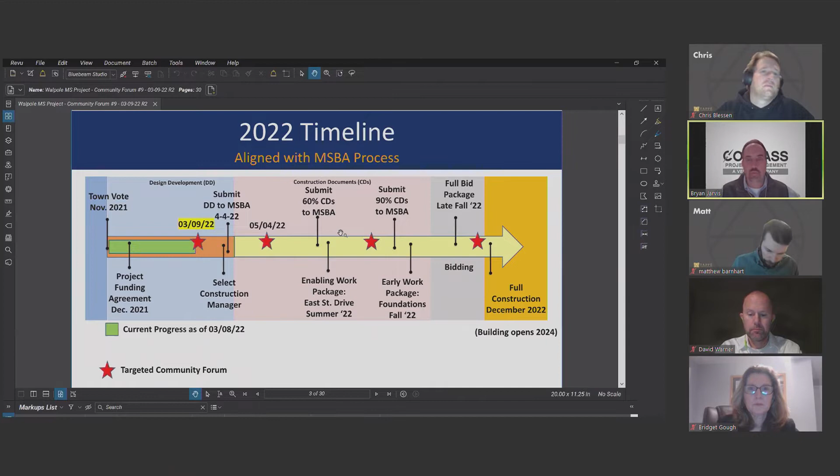The community forums that you see are target dates. We'll obviously adjust those based on when we think will be a good time for folks to meet. We'll definitely have one prior to the start of school, potentially right after the start of school as well, and obviously before we get into full construction. There might be a need for more depending on what information needs to be shared, but we will keep that updated as we move along. This timeline will be posted to the website after tonight's meeting, so you can reference that at your leisure.

Talking about bringing on the construction manager, we're currently doing that right now. We started that process after the town approved the project. We submitted an application to the Inspector General's office. They have to review that to make sure that the project is actually set up and would benefit from having a construction manager at risk. They review that and get back to us and issue what's called a notice to proceed. They did that in January. We sent out, it's a two-step procurement process.

We sent out an RFQ, request for qualifications, to see what construction managers are interested. They submit back what is called a statement of qualifications, basically their resume saying that yes, they have the experience, et cetera, to do this type of project. The town has created a qualification and selection committee. We've reviewed those statements of qualifications. We received 8 of those from 8 interested firms in the beginning of February. We've since narrowed that down to a short list of 4 at the start of this month.

And we will be receiving what's called proposals from a request for proposals as the next step. Those are due in 2 weeks from now. And we anticipate having interviews with all 4 shortlisted firms by the end of the month. And the goal would be to get the selected firm on board in April.

One of the benefits of construction manager at risk is the construction manager or the contractor will actually join the project team during design and help with things like estimating, working through the phasing and logistics of the project, like looking at the construction documents and making sure all the details are correct and things can be built the way they're designed and they're not going to run into issues. So it is an advantage. It does allow us to put together the project team earlier in the process so we can hit the ground running when construction starts.

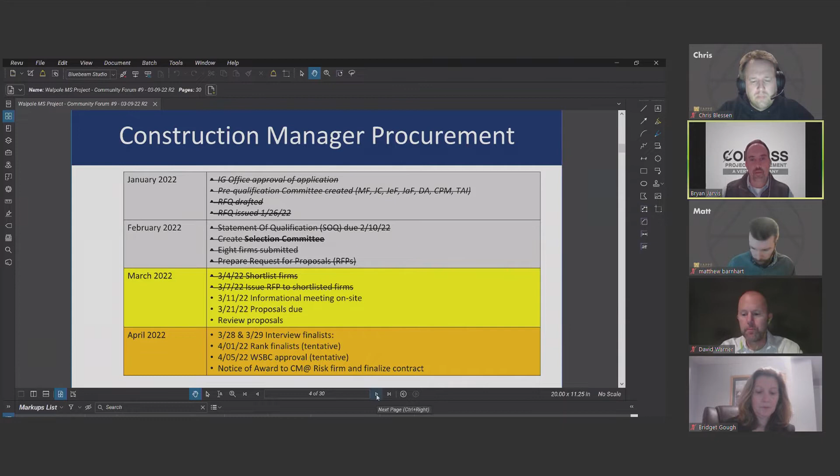Just big picture timeline, quickly, as I mentioned, there could be some early packages this summer that we'll talk about, really related to the enabling phase and getting the Bird site ready for construction. So when school resumes next year, we'll have the access and the temporary roadways and/or parking lots and separation from construction space and school space set up in advance, and then potentially starting on foundations of the new building as early as this fall, with full construction towards the end of this year in December.

Overall construction is estimated to take 32 months, give or take. And again, we'll be working through all of this with the construction manager when they're on board to refine some of these details and timelines, et cetera.

But we're anticipating 3 phases at this point: the enabling phase that I mentioned, building the new building, and then once that building is complete and Bird and Johnson are able to move in, then demolishing the existing Bird school building, finishing the site, which includes the parking lot, some of the access roads, and final landscaping and things of that nature.

The new building will be open for occupancy right now, targeting fall of 2024, with the project completed sometime early in 2025, obviously allowing for the spring weather and landscaping and things like that. And we anticipate that the project would be closed out potentially as early as the following year, 2026.

Which means all the construction work is done, all the punch lists are done, all of the final information is closed out, the final payment application has been done, all of that's been sent into the Mass School Building Authority, who will perform a final audit of everything. They hold the last 5% reimbursement to the town until that audit is complete. That process takes about 10 months to a year. So potentially by the beginning of 2026, the district would actually receive its final reimbursement back from the MSBA and the project would be closed.

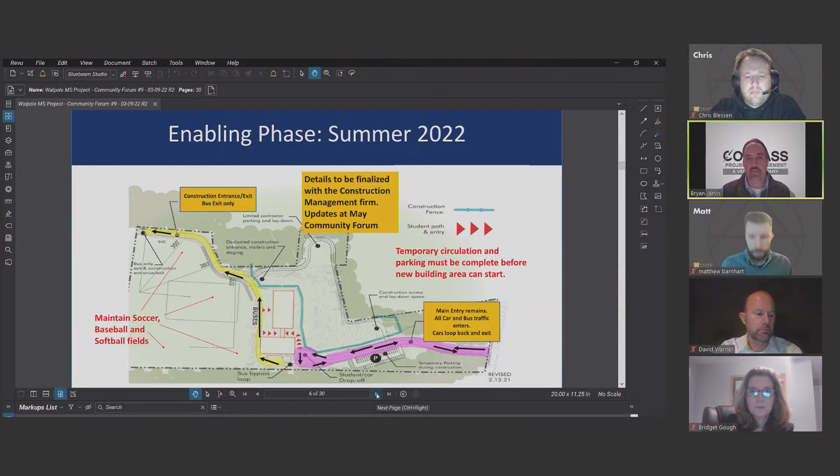Following the enabling phase will actually be the construction of the building. So once we're able to isolate the school's operation with the temporary bus loop and the drop-off loops and the parking, the construction fence will go up and construction will happen on the footprint of the new school, which you see here in the dotted red line.

Relatively close to the existing building. However, this is very typical for a lot of current school projects, simply because the existing school sites in many towns are the only sites large enough to actually fit new school buildings.

We've done this many times before. Most recently at the Natick Middle School, we were as close as 20 to 30 feet between the two existing buildings at certain aspects of construction. We also did this at Norwood High School, building the brand new high school directly behind the old high school. But most of our school projects, probably 90% plus, involve some form of the new building either in front or in back of an existing school, and then taking down the building once that's complete.

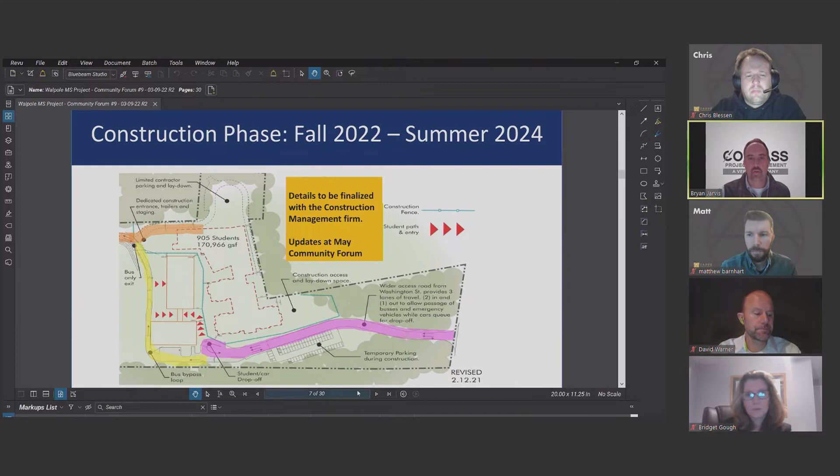So something we're very familiar with. The contractors we'll be interviewing are all very familiar with that too. They've done many similar projects, so we'll make sure to mitigate as many impacts to the school as possible. We'll be back to you with more details in May, but this is the general phasing of what we plan to do: set up the enabling phase this summer and fall, build the new building for approximately two years, and then finally, when that's all done, tear down the old building and finish the site.

And with that, I'll transition over to Tappé and Warner Larson to talk a little bit about the site plan. I think, David, you're up.

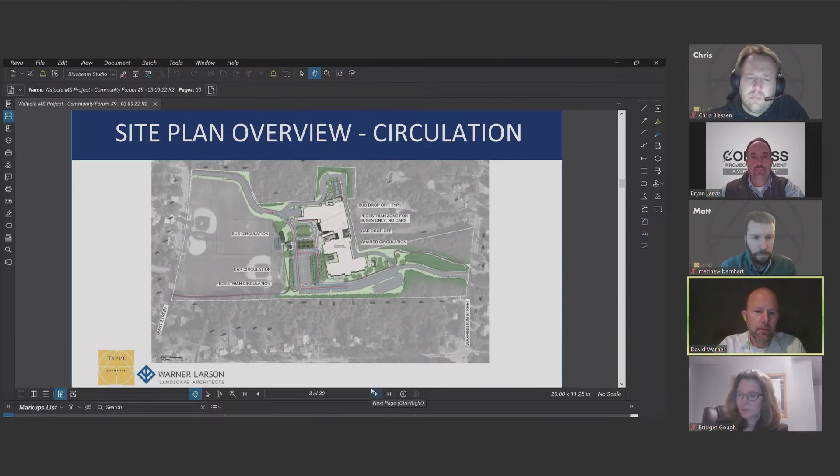Okay, thanks Chris. Thank you, Bryan. David Warner with Warner Larson Landscape Architects. The plan you're looking at is after all of the construction is complete. Bryan showed you how the phasing would work, but this is just an overview, and then I'm going to zoom in and focus on the circulation on the next slide. East Street is to the left and Washington Street is to the right.

Preserving the baseball field and all of the athletic fields is a very important part of the overall design concept, routing that new bus driveway coming in off of the street close to the property line. Another key component to the site design was preserving as many trees as possible on the Washington Street side, that natural character of entering the site. It's also relatively narrow in terms of its buildable area and topography. It's sloping, it was not really a highly utilizable area.

So we're keeping the existing driveway location coming off of Washington Street, widening it, adding a turning lane. As you're coming into the site from either direction, it can accommodate buses and cars, but the parent drop-off is coming in off of Washington Street, just as it is today and as it is in the phasing diagram. You'd be coming in and looping around through the main parking area and back out to Washington Street.

Buses can also come in that route and go across the front plaza of the school area and exit out to East Street. But buses can also come in off of East Street and go through the loop closest to the gym on the north side of the building and back out to East Street. Separating those two areas is this pedestrian zone, which is really one of the highlights of the site plan.

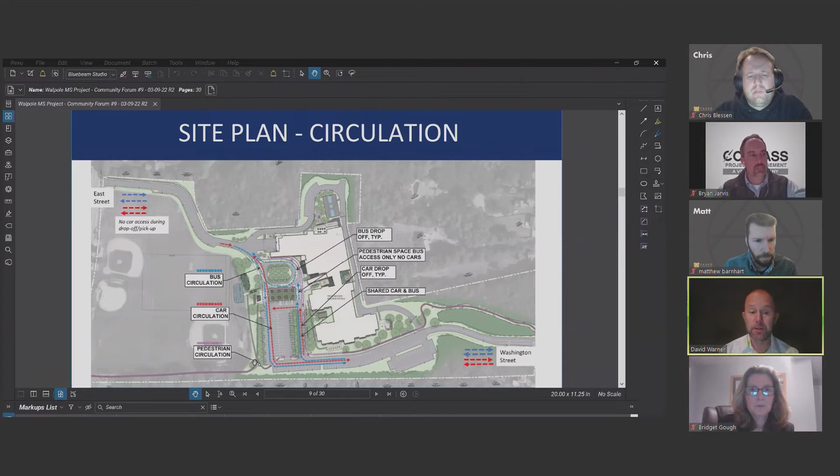If we go to the next slide, I really wanted to focus on some of the primary program elements. Again, this is a high-level view showing the entire site, but I think we can just go right to the next slide and zoom in so it's a little easier to see.

The things that we really wanted to focus on with this are the types of outdoor spaces that are going to be part of the experience for the general public coming to the site, and also for the school community using the outdoor spaces around the school.

So let's start first with that pedestrian zone. That image in the lower left is a 3D view, and you'll see bigger pictures of these renderings later in the presentation. That's a grove of trees that separates the bus loop from the car drop-off and park area, and provides that pedestrian link between the school building and the fields, and to the East Street way. The area to the north of the building, on the upper end, we see as a significant opportunity.

Outside the cafeteria, and you also have your auditorium on that end of the building. We've got this outdoor space - that three-dimensional view you see there, number 4, outdoor cafe and amphitheater - creates this space where teachers can take students outside that are directly adjacent to those supporting facilities inside the building.

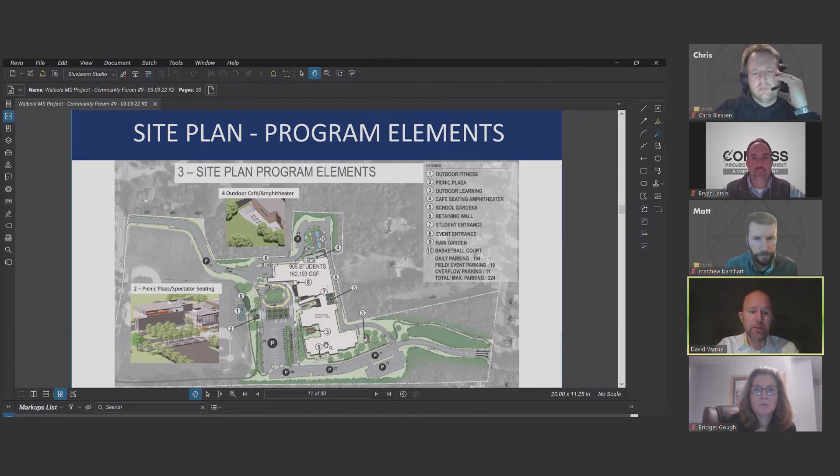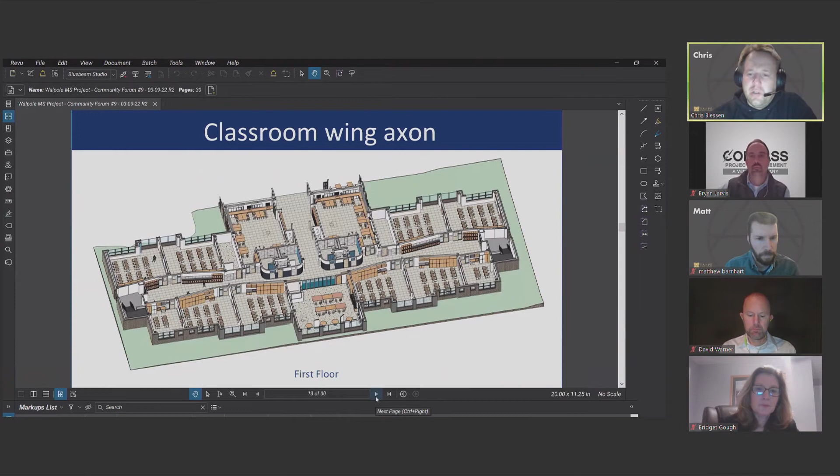Sometimes floor plans are not the easiest to read, so we wanted to show an axon of that floor plan block for the classroom wings. This bottom area could really be any floor, but we're showing you the first floor here. This gives you a more three-dimensional representation of what we just talked about.

Again, there are two teams shown in this diagram, general classrooms in that area, then the science rooms are on the main corridor there, the toilet room blocks. And what connects these two groups of classrooms is the big technology room, and that's on all three floors.

You might hear us refer to that as STEAM, which is an acronym for science, technology, engineering, art, and math. And then each of these wings is bookended with stairs on either end, and you can start to see those come to life in this view as well.

I didn't mention it before, but there's lots of natural daylight - you can see some of the windows showing up in these views too. Very calibrated and programmed natural daylighting so that, hopefully on nice days when the sun is out, we can have a lot of the lights off and save energy in the building. You can go to the next slide.

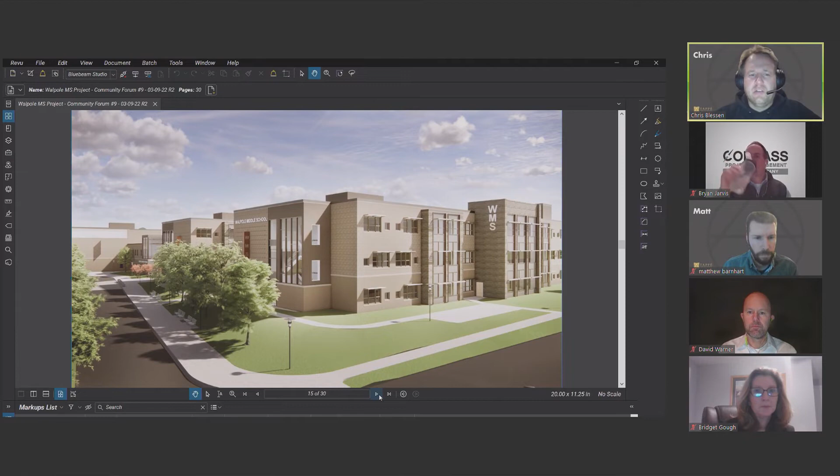So this is getting a little bit closer, not so bird's eye, but not ground level yet either. You can see a lot of the features David talked about earlier, with benches and making sort of a park-like setting for the school. You can start to see some of the textures and delineations in materials. We're trying to be creative with how we use normal building materials, because these aren't premium, super expensive things. They're very durable, and they look great. We wanted to exercise that as much as we can, and that's also more affordable in the long run.

Getting even closer again here, just highlighting some of those park-like settings.

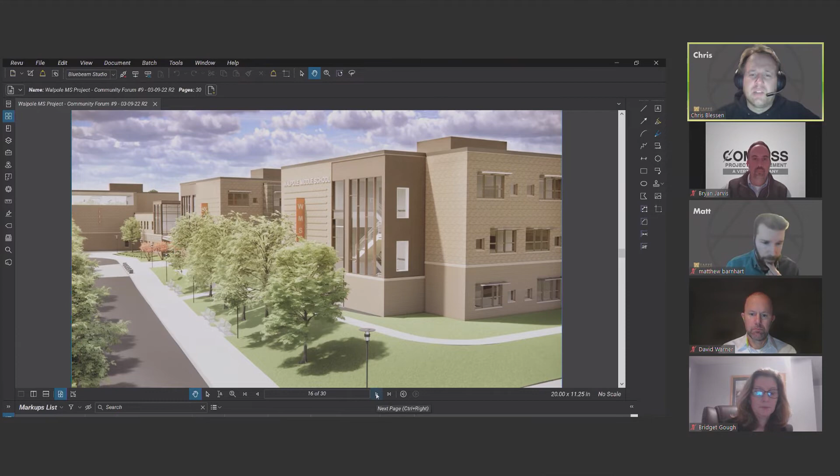Circling around towards the main entry, you can see that entry canopy poking out, and this is that pedestrian plaza zone reaching across. There'll likely be traffic cones or some kind of barrier set up in the mornings to prevent cars from going across this, but any buses that come from Washington Street would come across. This is really intended most of the time to be just a pedestrian walking zone.

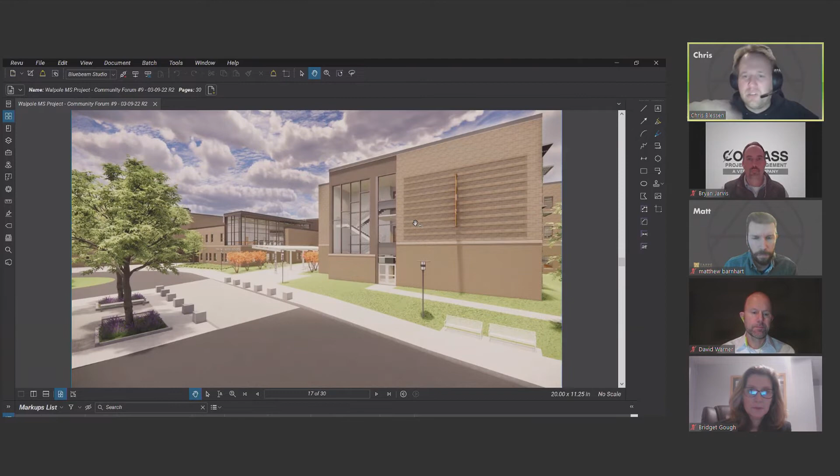On the wall to the right here, to the right of the stair, you can see how we play with the brick patterns, offset and inset bricks to create shadow lines, and that helps without adding expense to the project. It helps bring some character and expression to the building.

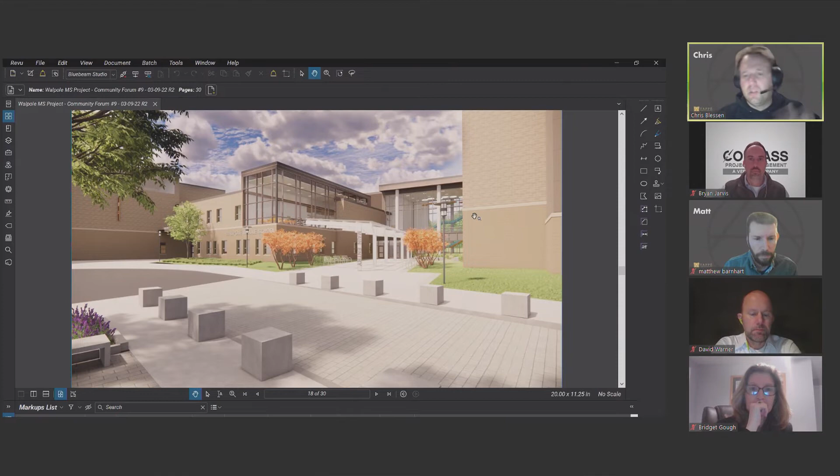Just another close-up of the main entry and the entry canopy, kind of a sheltered entry all the way into the building, and then the connection link in the background there that connects the more public zone of auditorium, media, gym, that kind of stuff to the left, and then the more secure or private zone of education that happens to the right.

Still circling around here, looking at the main entry.

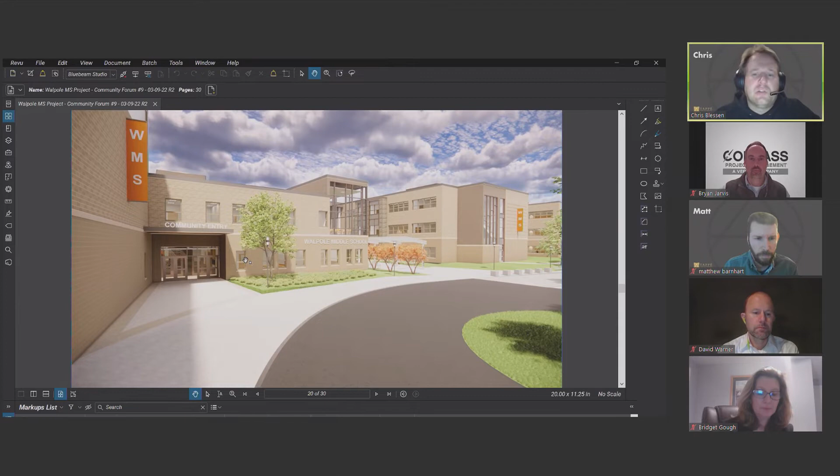Here's the community entry, just to the left of the main entry, designated as such, but this is really the quickest and best access to things like the gym and the auditorium, and it's right off of these main corridors of walking paths and things like that.

I think we've seen more detail here, just coming forward on these images.

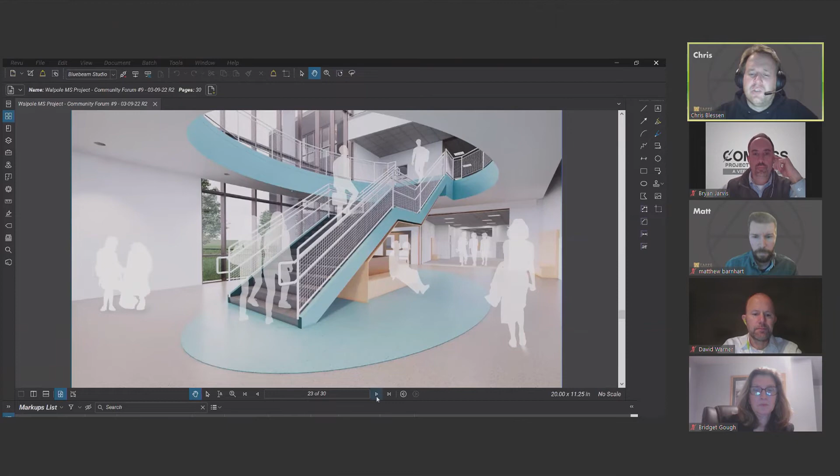So we're trying to do a lot of tying back to nature and bringing in those elements here, a lot of daylight. This central stair is a way to celebrate the center of the building, but also bring students back together to that little central location. We're trying to exude a lot of school spirit here and make it a gathering place, kind of that organizing element in the building, both in plan and then vertically as it's extruded up through all 3 floors here at this very important link moment.

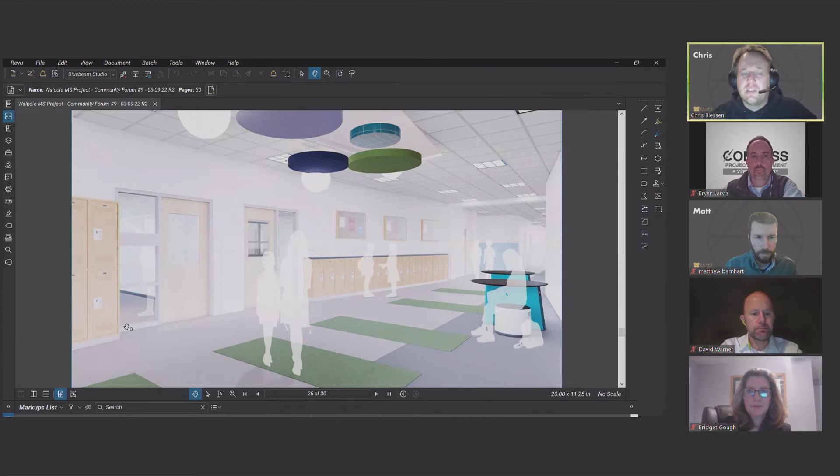And then some locker rooms with lockers with counter space, and a clear path for egress, maintaining that of course, but also opening it up where you can have a couple spots for sitting or collaborating on purpose with furniture, so students may still elect to sit on the floor. We see that a lot anyway, but this just enables them to have a little bit of space to stretch out, and then you can see that teachers can still monitor from the classrooms with windows and side lights in the doors.

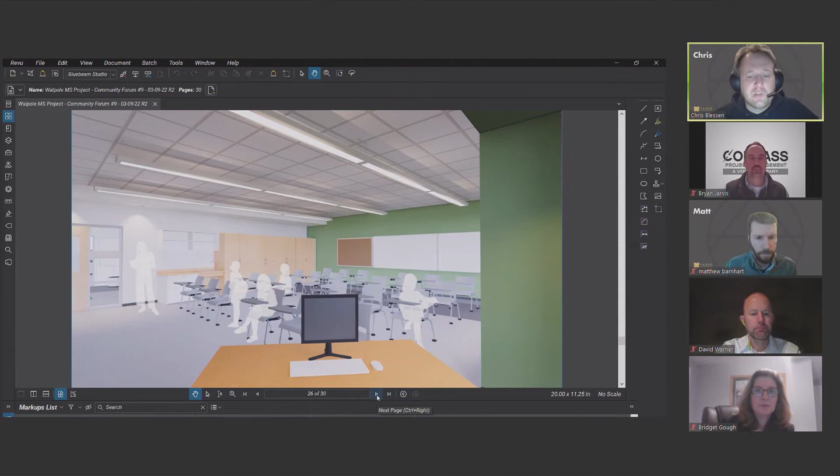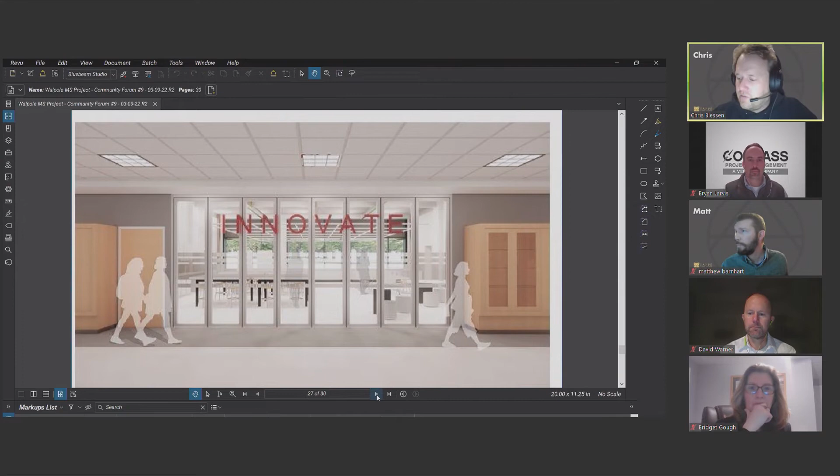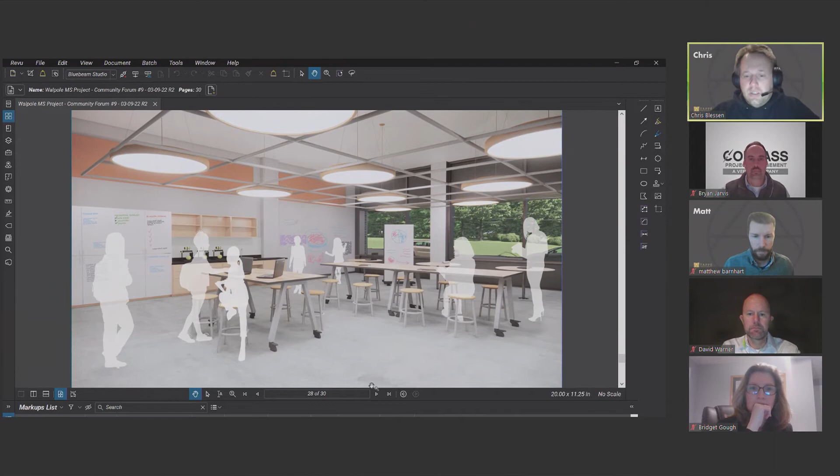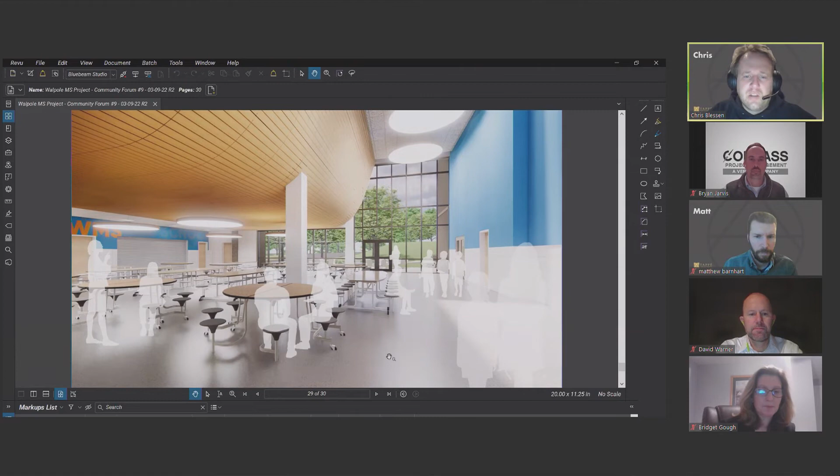So this area is 2 stories on the right, and then you see the glass at the end, and then the cafeteria, and above that 2-story space is a skylight to give some natural lighting when we don't need all the lights on. I think this will be a really great space, a really nice element to the building.

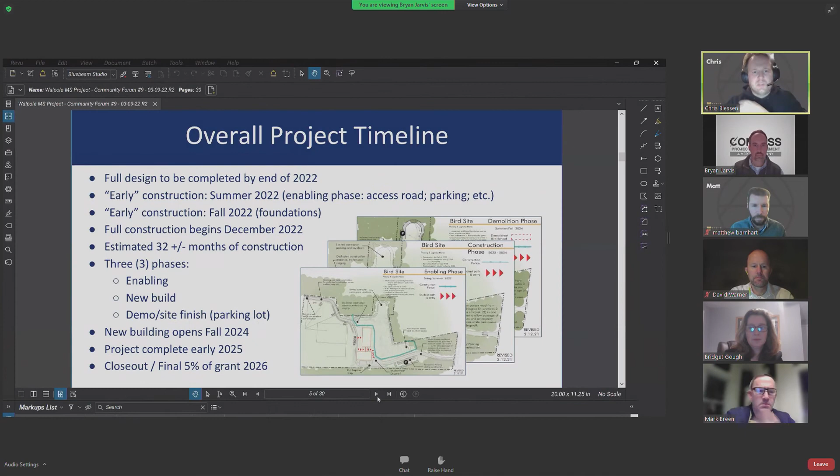I know it's early. Will all rooms have air conditioning? Also, where are the special education rooms located on the plans? Bryan, it's page 12, I think you have it in the floor plan there. So I'll start with the second portion of that first.

The special ed classrooms are anything in orange, that's what's designated in that regard. So just a little background, we submit a plan to the Department of Elementary and Secondary Education, and we submitted this plan, and it was very favorably received for the way that it's dispersed on every floor through every grade equally, so it brings that component of the program, a very important component, back into the entire building and throughout all grades, and that's really a strategic move with a lot of benefits.

And then in terms of air conditioning, the project is getting a system called VRF, which is variable refrigerant flow. Think of it basically as a heat pump system. Everybody's seen or has in their home the units that sit high up on a wall, and they blow the air out, and then there's a unit outside that does the condensing.

The VRF system will be able to provide heating and cooling, and also do that simultaneously throughout the building, and also take the refrigerant that may be heated up from south-facing rooms and pump that over to north-facing rooms and recycle the energy that's in that throughout the building to create an equalized or normal temperature and atmosphere.

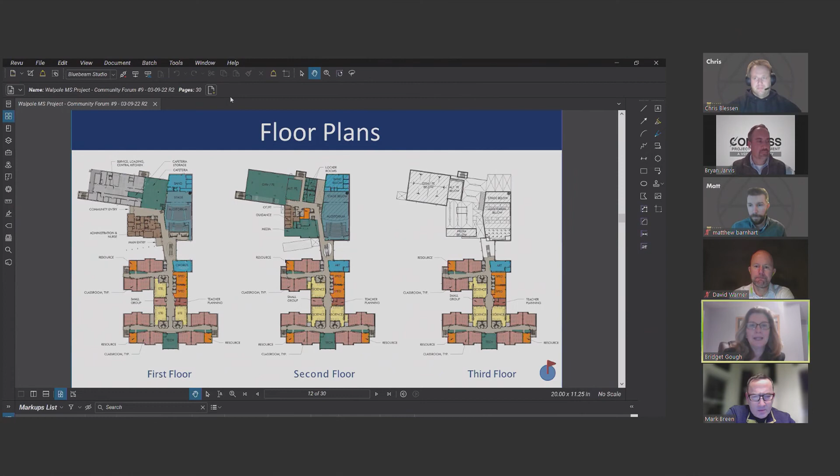Thanks, Chris. One comment, this looks fantastic. Thanks for all of your work on this. Very excited for my kids to attend. Couldn't agree more, it's extremely exciting. A lot of work, but what's really exciting is when you see these designs becoming more and more detailed and starting to come to life. This isn't something that happens overnight, it's a very long process with a lot of people involved. So thanks for that, appreciate that.

Another question, do the windows open to allow fresh air? So the current plan is for them to open. Basically it's what we call a hopper window, so they crank in or out—I think it's out in this case—and they will only open to a certain degree. There's actually code requirements for commercial buildings and schools for how far they can open. But yes, the plan is that they will allow fresh air into the building.

The intent is to do some training for the occupants because these are high performance, very highly calibrated buildings, and the systems on them are very smart. We don't want the systems to work very hard to do the work they're supposed to do, and then someone opens a window and it counteracts that. So we want to train the teachers to know when it's the right time to open windows and when it's not.

Also, the fresh air component to the building is already built in because that VRF system I was talking about is 100% fresh air and 100% exhaust air. So when we're exhausting air from the spaces, it goes completely out of the building. It's not recirculated in the building in the sense of taking room air and recirculating it through a coil and putting it back in the room. It's sending it out and being replaced by fresh air coming into the building constantly. There's an air change of several times per hour to make sure the fresh air is happening, even when the windows aren't open. So I just want to make sure that's known.

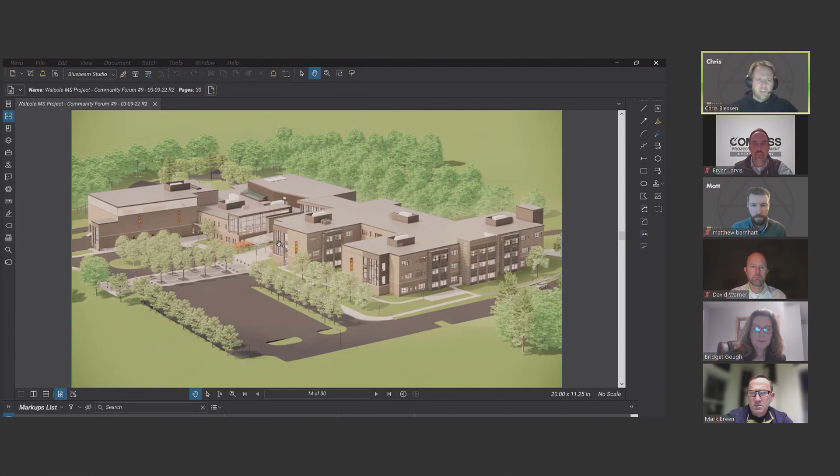Yeah, I can talk about that a little bit. Some of it we can't talk about, unfortunately. But some of the big features—we have people on our staff talking through with the district, and a security planner whose only job and consultancy on this project is for those things. There's a whole line of thinking that goes into design called crime prevention through environmental design, or CPTED as people call it. That's really a whole body of design elements gathered around how to prevent action before it happens, just by the design of the school.

So the see-and-be-seen component is something some people argue on both sides of the fence, but it's one of the mechanisms that if people are seen in the building, feel like they're part of the community, and are known to be there, then it prevents people who are in the building for the wrong reasons from getting in further. The building also has certain compartmentalization features where we can lock down parts of the building to prevent people from getting further in when the threat or nuisance is identified.

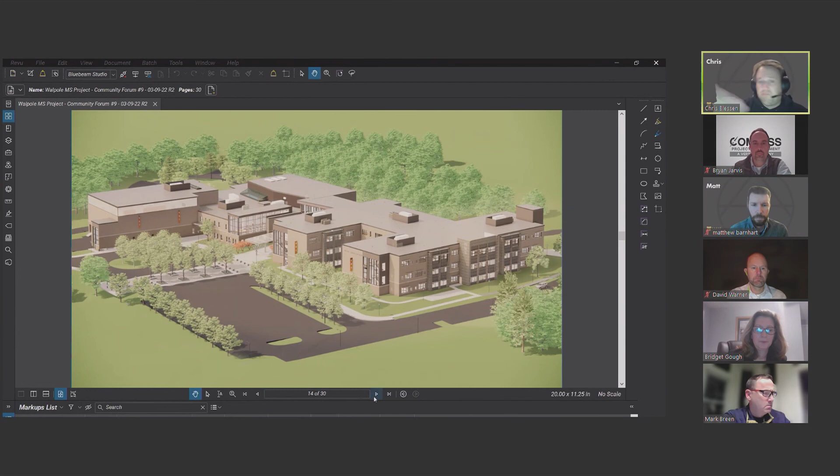There's safe entry at the vestibule. Over 90% of the time, parents or visitors come to the school because a student forgot an instrument or lunch or something like that. We don't need to let all these people into the building. Currently at the Bird School, you have to go in the building, around the corner and down the hall to the principal's office. Right now you can go into this vestibule where the cursor is, and you can't get further into the school without being allowed. If you just need to talk to an administrator for maybe an IEP meeting or something of that nature, you can go right into the conference room that's right there. This is a more known feature, and there are other layers of security we've put into the building that are designed to not necessarily be out there.

Thanks. Bryan, I'll give you this one.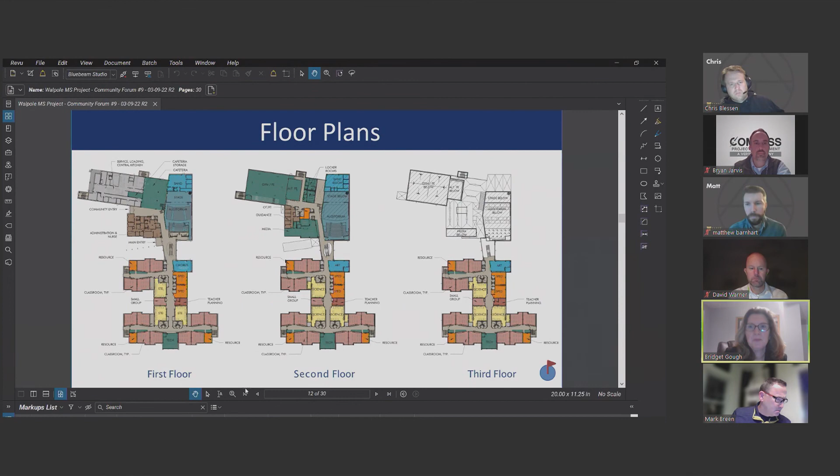Can you explain the bidding process and will we be getting information on who is chosen to build the school? Oh, you're on mute. Go on mute, Brian. Oh, there we go. Sorry, it wasn't popping up.

Sure. So we are using Chapter 149A, which is the construction manager at risk process. We are actually bringing a construction manager on during design, as I mentioned. We will be working with that firm all the way through design to put together what's called a guaranteed maximum price, or GMP. Basically, the construction manager will start to build the project construction budget in line with our budget, doing that all through design, estimating along with the project team, starting to put together all the costs associated with the construction aspect.

We still have a traditional bid process for all the trade contractors, which, as I mentioned before, are the HVAC contractor, the electrical, the plumbing, the painter. There's probably 15 of them on this project. That's a traditional bid. We'll send out the bid documents, pre-qualify trade contractors who qualify to bid on this type of project, this size and scope. We'll get those bids back, and then the construction manager will take the lowest responsible bidder, plug that into the overall construction budget they're putting together, and wrap that all up into a final number.